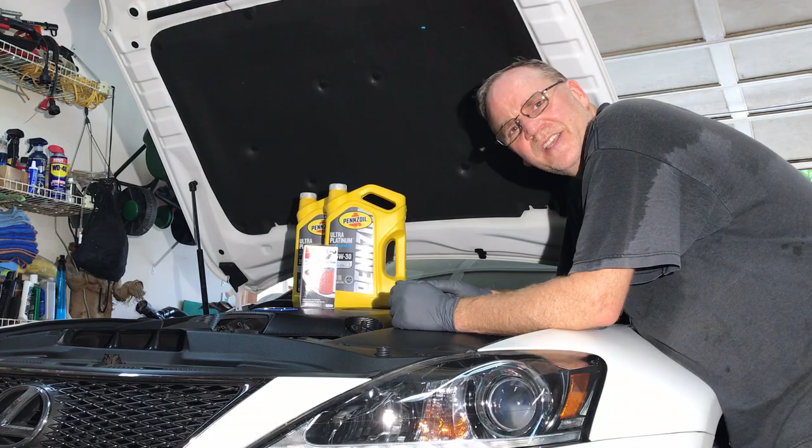Today we're going to be doing an oil change on a 2011 Lexus ISF. Should be very simple. There's lots of videos online. You should be able to find a whole bunch.

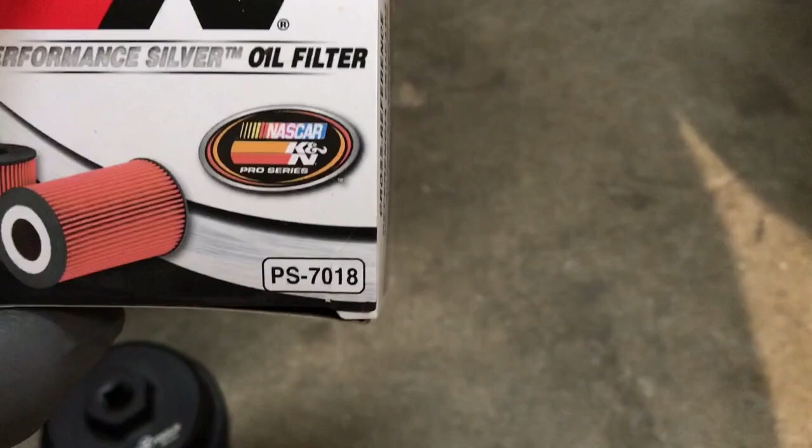Also, K&N filter - make sure you get the right one for this car. The one that is for this car, just so everybody knows, is a PS7018, and that is the performance version of the K&N. You can get it on Amazon for about $4 and change shipped if you're a Prime member.

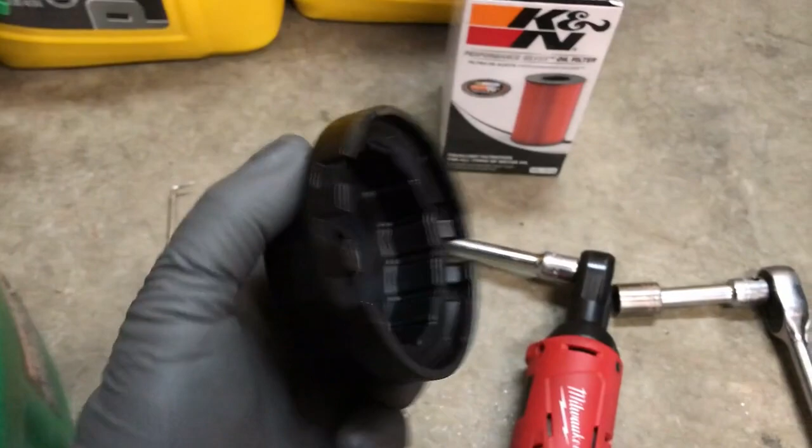One of the other tools you need to have is sort of an oil filter wrench. It's a special one specifically for Toyota. You can see it's got these little teeth inside, it kind of grabs the housing, because this is just a cartridge filter - you can see it on the picture. And the outside gets reused over and over again to try to save metal.

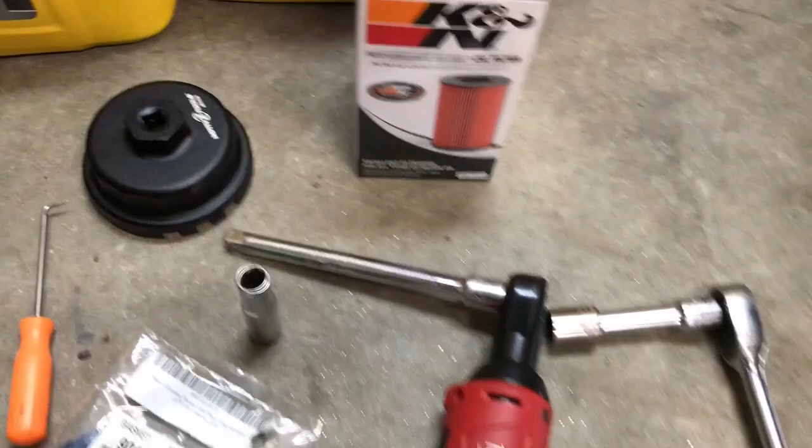This is another one I got on Amazon. There's about 20 or 30 different types. Again, this is a Motive Tools - I like the powder coating on it. I've dropped it a bunch of times, hasn't chipped. Does real good, it's nice and strong. Again, you can get what you want to use.

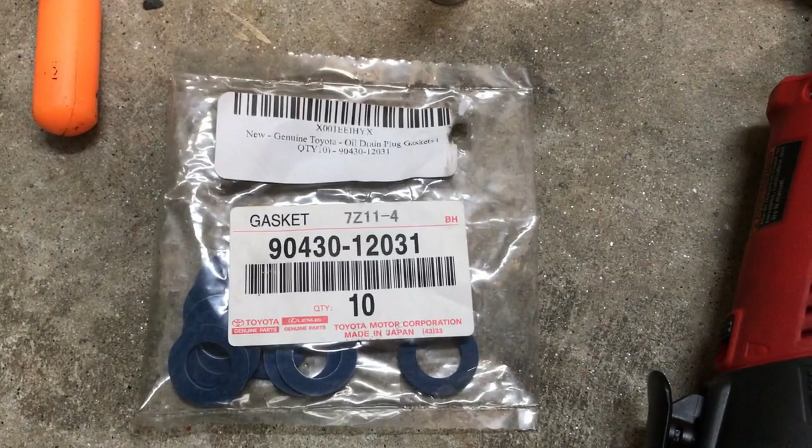Gaskets - so this is the oil plug gasket from the pan. This is a Toyota, it's a genuine one. I usually get a package of 10, I get them on eBay. I can also get them on Amazon, but that is the part number, the 90430-12031. I'll probably put a link in the comments below so everybody can try to find these things on Amazon.

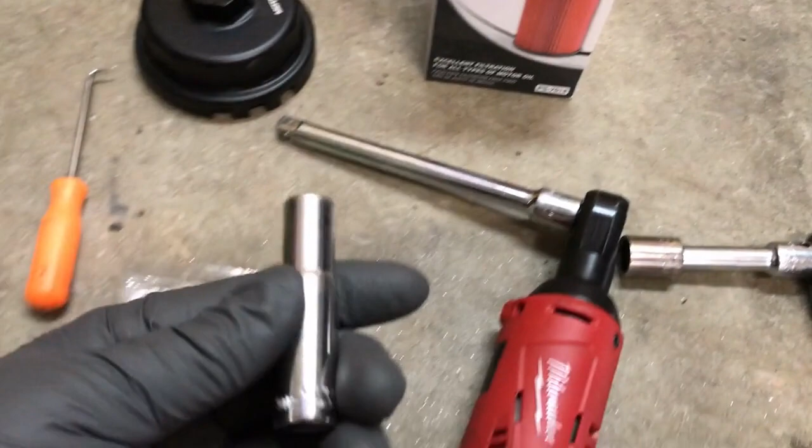The only two things you really need is your standard 10mm socket and a 14mm socket. The 14 is going to be for the plug in the pan, and the 10 is to get access to the door to the oil filter.

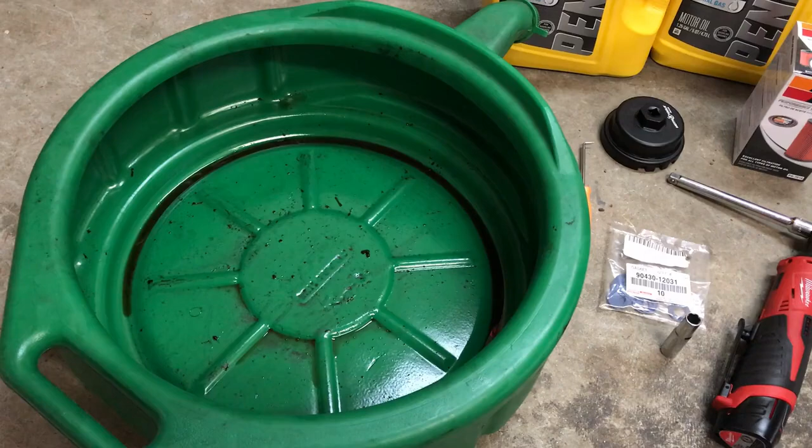Besides that, I have a little pick to try to change the O-rings in the housing, the oil filter housing, and then a really, really big pan, because you are taking out almost 10 full quarts out of the car. So if you have one of the little black pans, the ones that are graduated, they only hold about 6.5, so it won't make it. So this one is typically like an antifreeze pan, but I've started using it for oil changes. So that's really what you need.

You can have one of these automatic tools if you like them. I plan on using the pan. This is for the pan, and this is for the 10mm bolts. But you can do it how you want to do it. So now that we've got all the tools, whatever you want to call them, off we go.

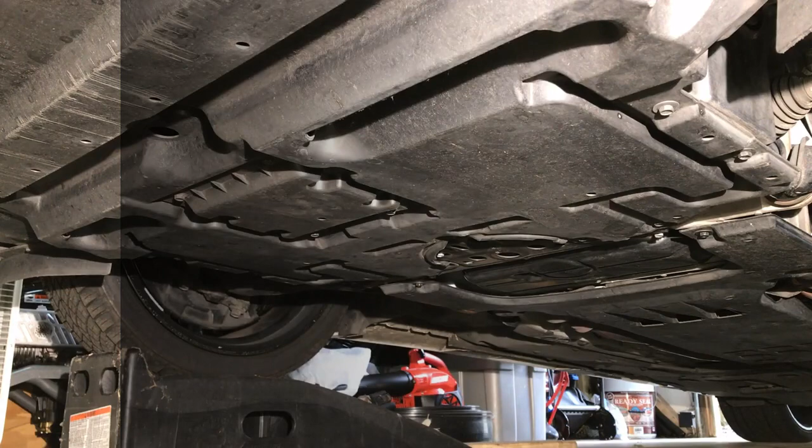So here we are into the car, just trying to give you an idea of where everything is. I try to use ramps when I do my oil change. On any other kind of service work, I use jack stands and a jack.

With an ISF, they're very, very low to the ground. These are, I forget the brand, not Gorilla, probably an AutoZone brand. I have to use, you can see over here, maybe you can't, I've got 2x4s over there. That's the only way I can get up on these jack stands. Otherwise it just doesn't work in any way, shape, or form.

So you've got two places you have to get to. To get to the oil filter, you have to get right here, this access door. It's got four 10mm bolts in the corners. All you're going to do is take the four 10 bolts, drop it, and the little door opens up to get access to the oil filter.

Now the pan sits farther back, way back here, kind of hard to see. I'll go back there and climb back there and show you where it is. The pan's plug is at the back end of the pan, so it's going to fall that way. So what we'll do is take our oil pan, catch pan, kind of shove it under the car. So that gets you there.

But let's go ahead, first things first, let's open the door. Make sure we got your tool going the right way. So here you go, there's 4 bolts. 1, 2, 3, 4. So we'll hit this back one first.

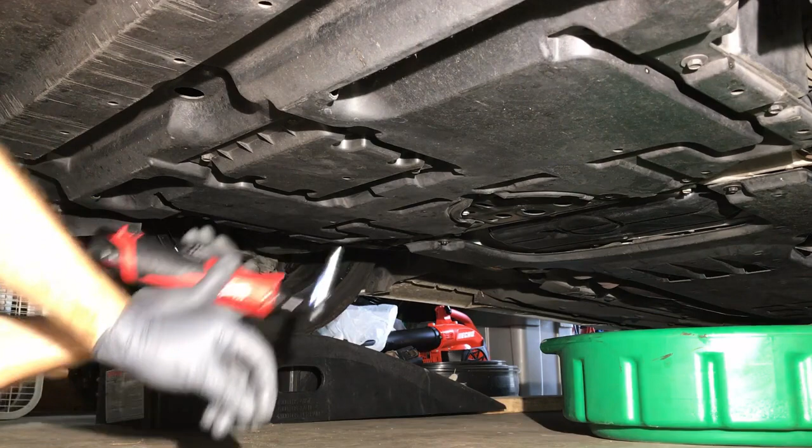There's 1. There's 2. There's 3. And there's 4, and you can see it all just falls apart.

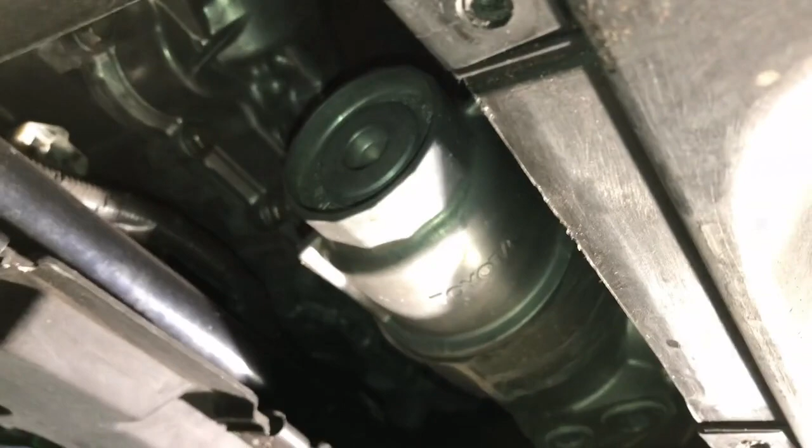So I'll give you a view up inside here so you can see what we're working on. Okay, so coming from where we are at the front of the engine, you can see again there is the filter housing. So we're going to start to look back towards the back of the engine, give you an idea where we're going. Okay, so where you see that circle, that is the oil pan right there.

That's the oil pan. Now come back here, I'm doing a backward shimmy here so you can see there's the plug. That's the plug, and you can see it's facing backwards. So that's a 14mm, just get a wrench on it, take it off.

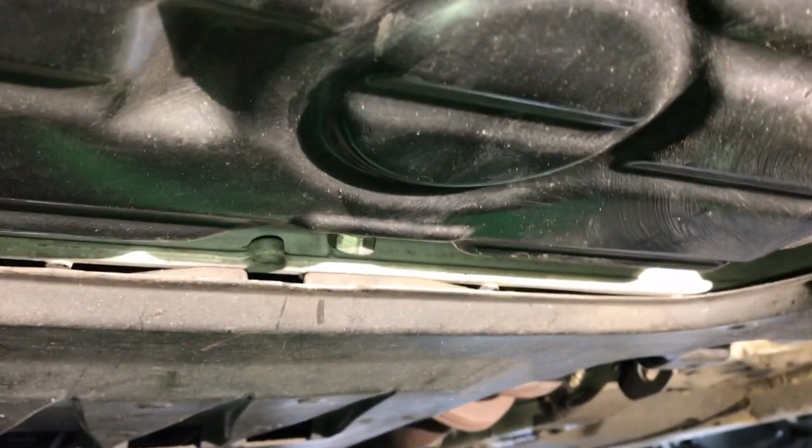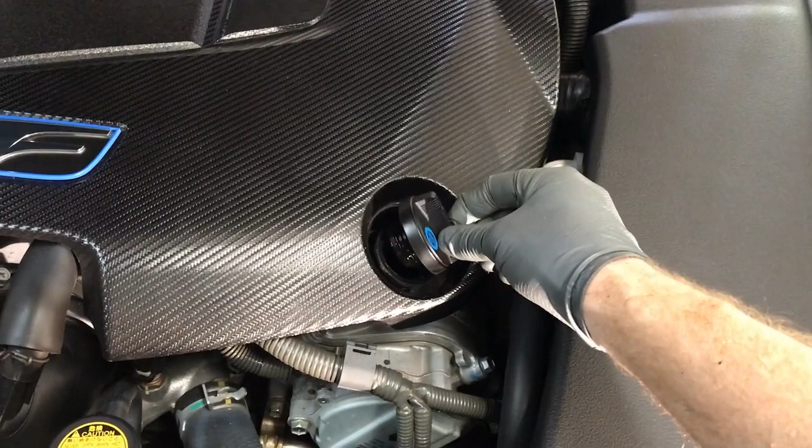What I typically like to do is drain the pan first, then crack open the oil filter afterwards. So before I start opening up the pan and go after the filter, what I like to try to do is come up here to the fill and just open it up, let some air get into the crankcase. It'll help drain everything a little bit. Some people believe in that, some people don't. I've been doing it since I was 10, helping my dad change oil.

So, on to the bottom. Okay guys, so here we are back under the car. We're going to take our 14mm and just put it on the plug. I already tried to loosen it up a little bit before. Let me get the pan out of there. Tried to loosen it up before, so it's probably already broken. Yeah, it's loose. So all you gotta do is make sure you turn it the correct direction to get it off.

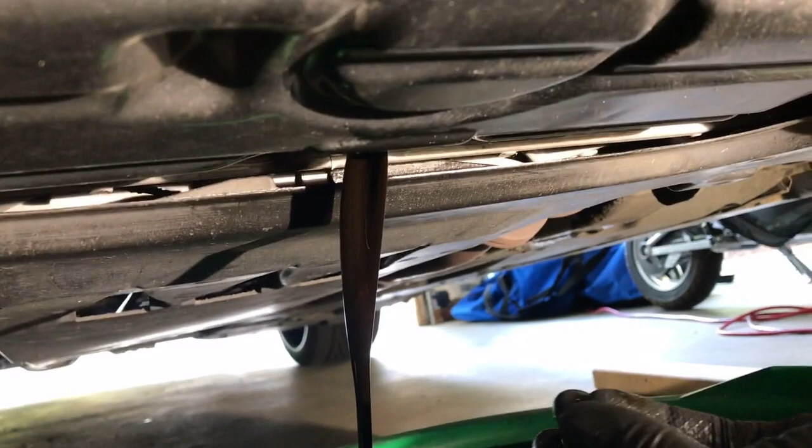Okay, you reach up on here, unscrew it, and there it goes. Okay, so not too bad looking. Again, this was the Amazon Basics Full Synthetic 5W30. It's a little darker than I would be happy with, I guess. But I'll be doing Pennzoil from now on.

So what we'll do is, I see that the plug gasket is not on here. I don't know if you can see that little blue gasket. It must either be stuck on the pan. I could feel it, it's up on the pan. We'll have to make sure that comes off. That's something very important.

You do not want to double up the gaskets on the pan. You will squirt your oil everywhere. So we'll let this finish draining out, and we'll get started on the filter.

While the oil's draining out, you can take the plug, take a clean rag, and really wipe it down, get all the oil off of it. Make sure you got it really clean. Look for any kind of contaminants on it, anything that's on there. Sometimes these plugs are magnetic based, and you could find little particles on there. I don't know if this one is, it might be, but I've never seen anything in all the times I've changed the oil. So that's a good thing, I think.

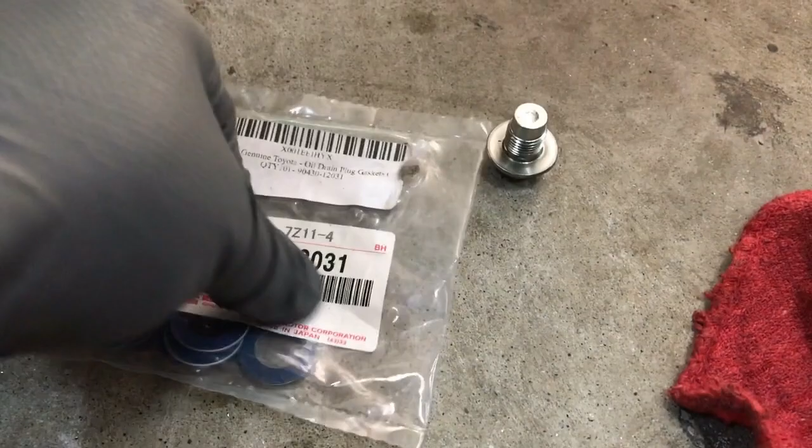Now what we're going to do is take one of these gaskets out and place it on the plug. I dug one out of the bag, and just to show you, the gaskets are basically the same on both sides. They both have a blue side to them, so there's no right or wrong way that I know of. I could be wrong. If I'm wrong, guys, just put it in the comments below saying you have no idea what you're doing, and I'll start doing it the right way. But as far as I know, I've always put these on any old way. You just slide it on, and that's pretty much it.

That is ready to go back on the car, and we're just waiting now for the rest of the oil to drain out. You can see it's starting to drip. Another minute or two, we'll go ahead and close this up. It's pretty much slowed to a drip.

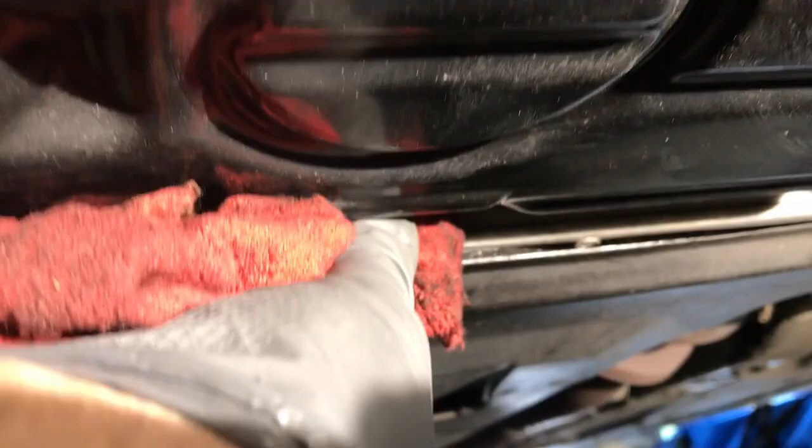What we're going to do is wipe here, and I'm going to try to feel if that gasket feels like it's on there. I may have to go back and peel it off because getting my finger on it's not doing anything. So we're going to have to go up there with a pick and maybe a scraper. I'm not sure why it's so stuck on. Never had it stick so hard before, so we'll get on there and see if we can peel it off somehow.

Yeah, its gasket's on there. I don't know if you can see it. It's kind of, let me get a pick here. You can see some of it peeling up right here. It's blue, you can see the blue on it. So I don't know why it's stuck on there, it usually doesn't, but in this case it did.

If the pick isn't going to get it off, probably what we're going to do is have to take a scraper and scrape it off, maybe even a razor blade possibly. Like I said, I'm not really sure why it's so stuck. Let's see if we can wipe it off real quick. You can pretty much see all the blue. Right here, I can feel it, it's definitely got a felt kind of feel to it. Why it's jammed on there, I'll never know. But yeah, got to make sure you get that off completely and totally. That will cause an oil leak while you're driving. So we're going to have to scrape it off. We'll go ahead and get some more.

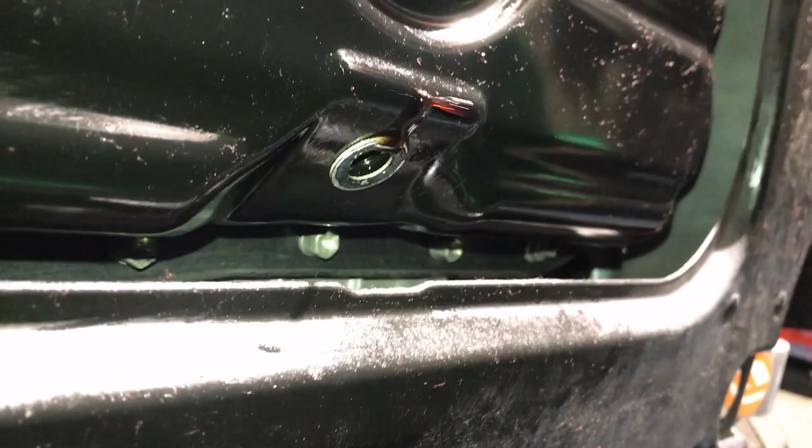Okay guys, after a good 5 or 10 minutes of scraping with a razor blade and a gasket scraper, I got it, so it's pretty good. I mean, there's still some stuff on there, so I'm going to try to clean it up a little bit more before I put the plug on. But yeah, I'm not sure why this gasket stuck so much. It may have been on there from the previous one maybe, but I usually check them and they really didn't look like anything. So it looks pretty good.

I think what we're going to do is go ahead and put the plug in. I've already got the gasket on the plug, which I might be regretting next time I do this. But all it is, you just basically slide it in, thread it on, and you can see I've got the gasket on there, a little tinge of blue and the white. That's all it is, thread it on. And you want to torque it to spec, which we'll talk a little bit about where I get my specs from. But let's just get it so it stops leaking, and then we'll torque it up.

Okay guys, let's talk next about instructions and torque specs.

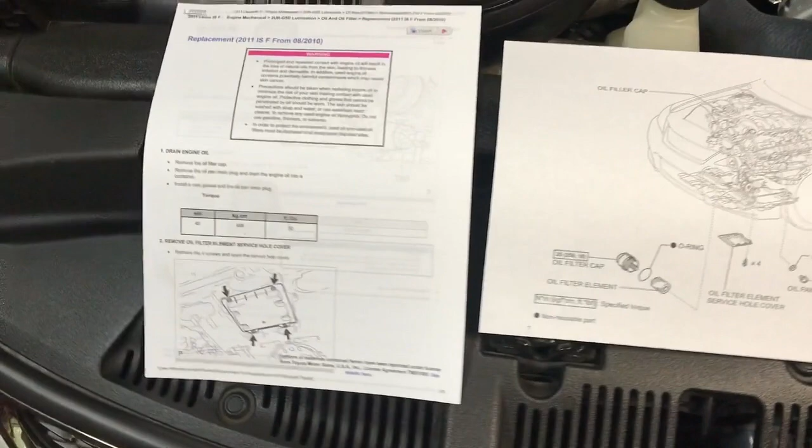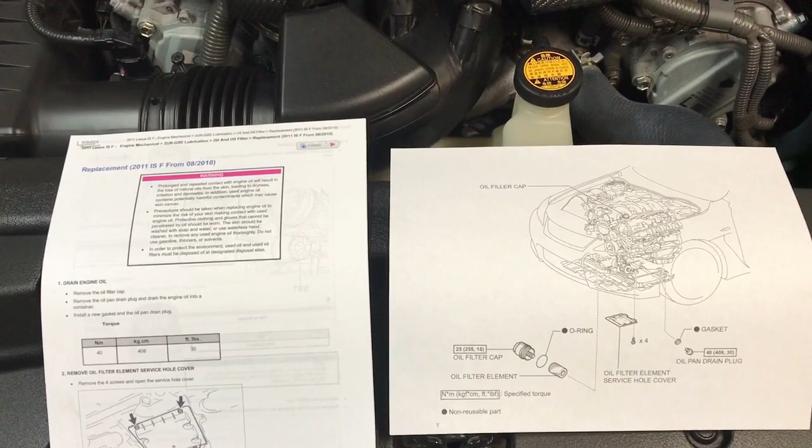I've used two different types of online instruction manuals. One is ChiltonDIY.com, typically about $22 a year, giving you access whenever you want—you can bring a tablet or computer out to your garage and log in. A lot of guys online like emanuals.com. I used it for my F, needed a 2011 manual but they sent me a 2012. When I asked about it, they said it's basically the same thing, so I took it. It's fine, it works, it's a PDF, and it gives me all the information, but it's kind of jumbled and all over the place.

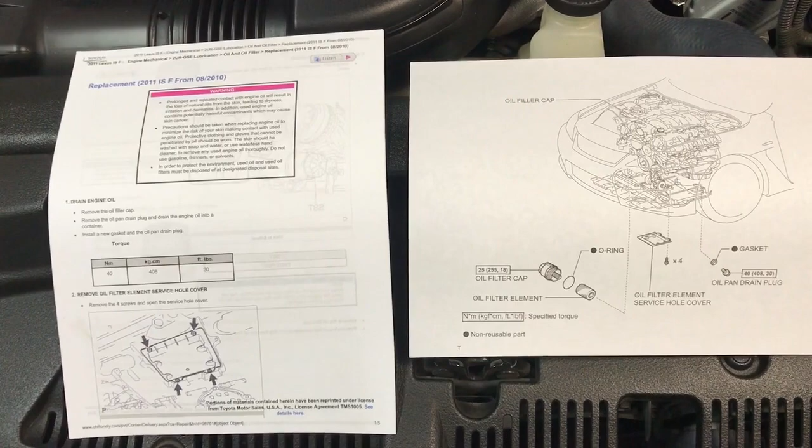With Chilton DIY, you're logging into an online manual, and you can actually save each section you want as a PDF. So you get the whole manual online, but you can save individual sections you need and use them whenever you want. To give you an idea, these are Chilton DIY manuals.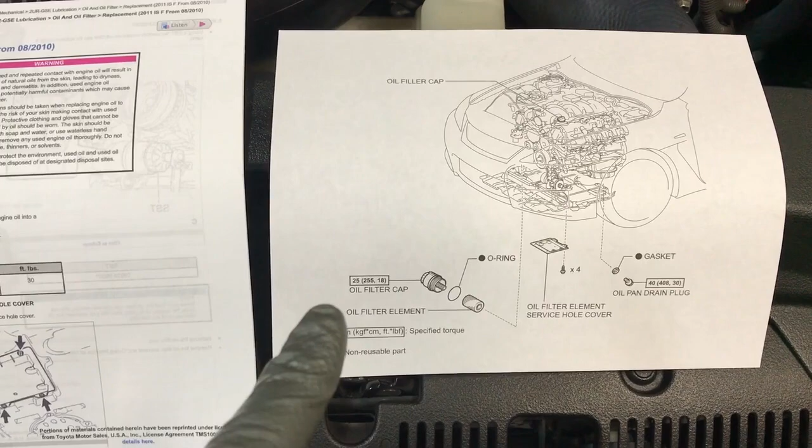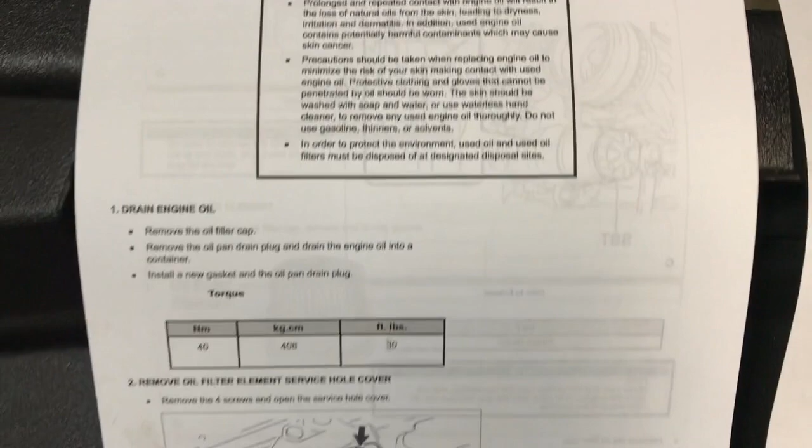This one is basically a components list—that's the header of the section for oil and filter changing. This particular one is replacement of oil and filter, and you can see at the top it says engine mechanical, oil and filter, replacement. It goes step by step, like drain the oil, and gives you the torque specs for the plug—there's the four 10mm bolts.

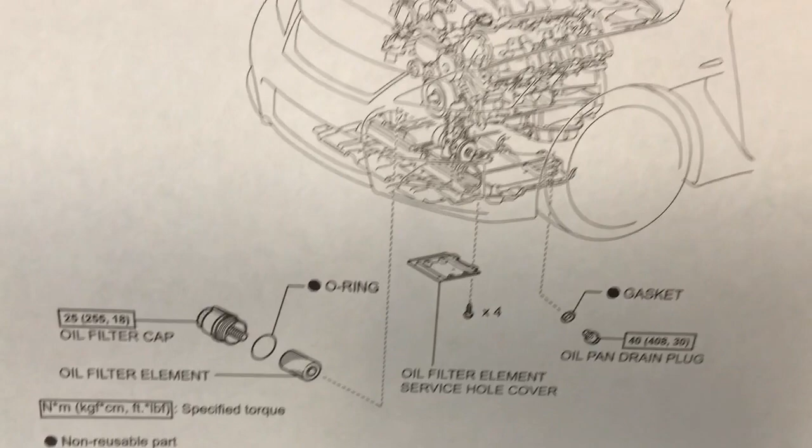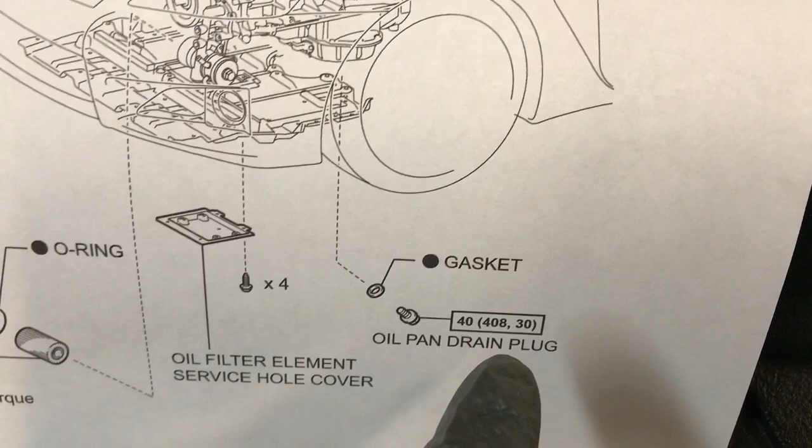Or if you want, you can come over here—again you can see the different torque specs. The one we always want to look at is the last one, which is in foot-pounds. For example, here's the drain plug gasket: we want 30 foot-pounds, and that's the same as over here on this other information—there it is, 30 foot-pounds.

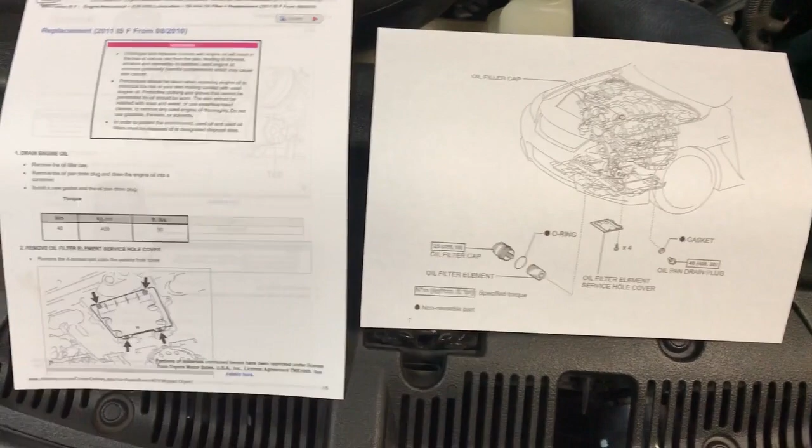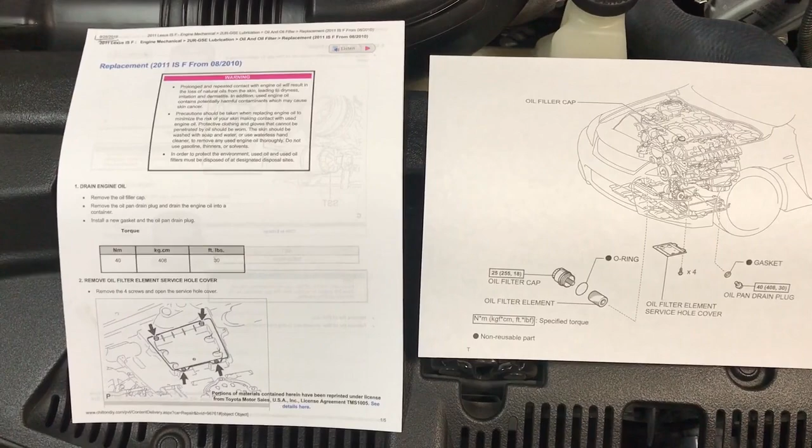So you guys can use what you like. I've been very happy with Chilton—I typically buy it once a year and download what I need. I've been downloading a lot of sections and saving them. The e-manual is fine, it has everything, it's just very hard to find things, in my opinion, maybe just for this car. Maybe for other cars it's really well put together. I've seen a lot of guys on YouTube use e-manuals and recommend them, which is why I bought them, and they were okay—I just really do like Chilton better.

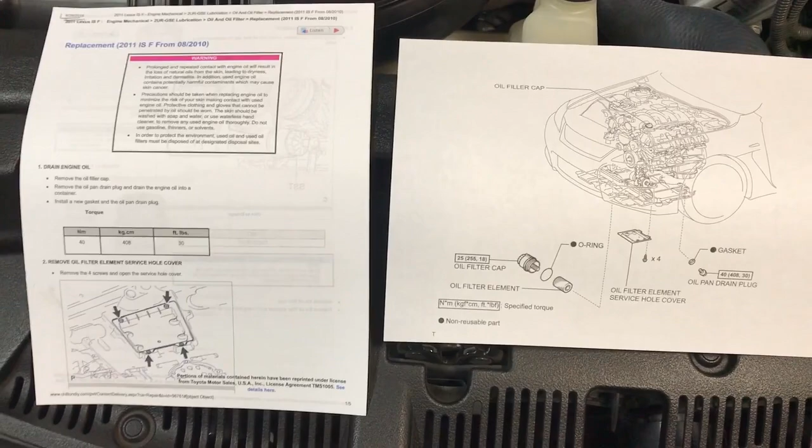So now that we know it's 30 foot-pounds both there and there, we'll go ahead under the car and tighten the plug up. Okay, we're back under the car, and I've got my torque wrench set to 30 foot-pounds. We're going to go ahead and put it on and start tightening it up.

30 seems like a lot to me, but hey, that is the spec. I'm just going to take my time. That just seems very, very tight. A lot of times I usually do it by feel. I'm probably going to stop right about here because this just seems fine. I know 30 is what it's spec'd for, but I'll be honest with you guys—there it is, right about where I was going to stop. Look at that, torqued up to 30 foot-pounds.

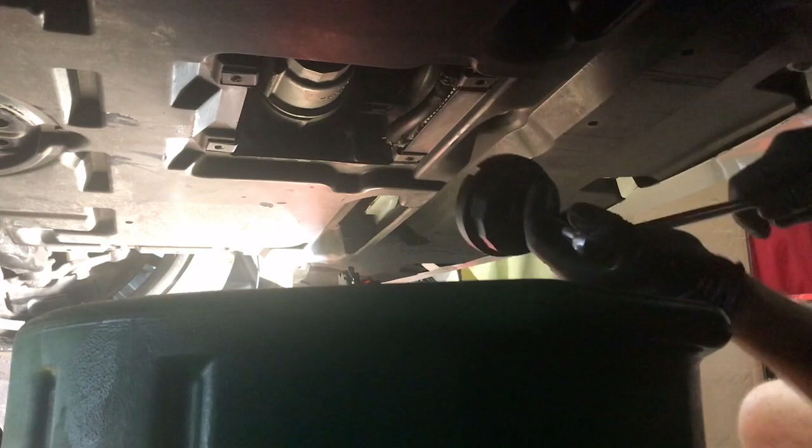Wipe up whatever you've got left—clean up the pan, anything that might have missed back there. All right, we're on to the filter. Here we go, we're going to go ahead and try to take the filter off. I've got the light off to the side, and if there's not enough light, I'm sorry—the light just seems to be blinding. So you got to make sure you have it on off, obviously.

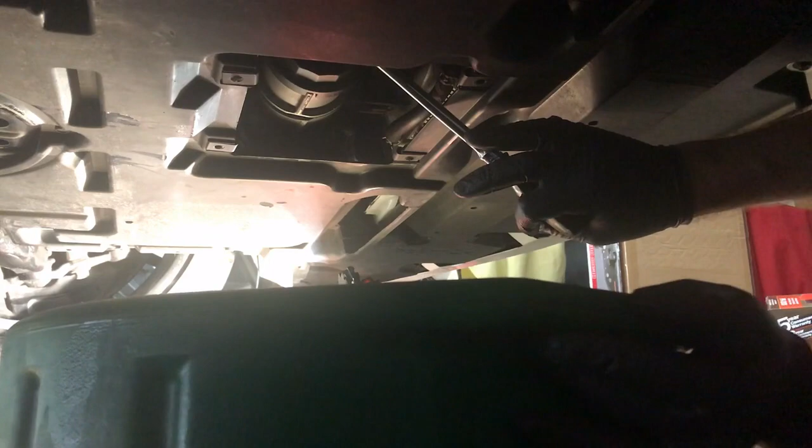You're going to fit, as we saw before, the filter wrench on the housing. Just fit it on, get a good slide, and then give it a pull until it breaks. Now you got to make sure your pan is directly under this—it's going to start leaking from here, if you can see it. Hopefully you can. It comes off pretty easy, not too bad. Now you can see maybe there's a notch in here that you want to line up—there's one of the notches that falls in place.

As you wrap around to the other side, you'll see there's another main notch right here. So that's how the wrench works, you're trying to get the notches in. Once you get it enough that it's hand loosened, you just take your time and it does come out. There it is. That's the O-ring that loosened up, and it's coming off here. There's your oil, so you want to let it start to drain.

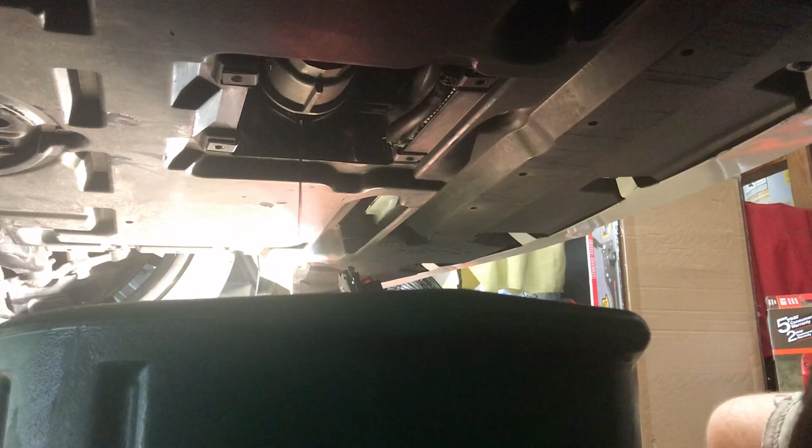Now on the ISF, they do not have a drain plug in the back of the housing. On some of the other Toyotas that have the same similar filter cartridge, they actually have a plug on the back you can unscrew and put a little insert plug in that drains out the housing. This one doesn't — I'm sure it's for reasons, maybe it wasn't designed that way at the time the car was made, don't know. My wife's 2015 Sienna has the same type of housing. I think it's actually the same filter, but it has a little plug on the back of the housing. You can unscrew it and pop in this little drain plug that opens up a valve and lets the oil come out, and when you open it up, it doesn't all come out. So basically what I do with this is I just let it slowly drain out.

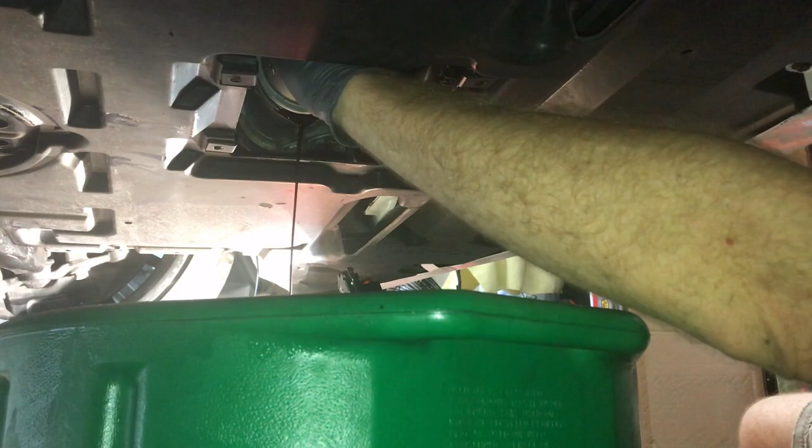Just letting it all go — you can see it, hopefully you can see it coming out. So I turned on the light, hopefully that helps a little bit. So you can see it draining out now. You can bring a little bit more, maybe just keep loosening it by hand. The more you loosen it, the more you're going to get out. It's starting to lighten up. There we go, alright, it's out.

So as you pull it, a lot of oil is going to come out. There you go, you want to make sure you keep it over the pan and drain it directly in, so it's not completely... Now the cartridge may slide out, you just have to be careful with it. You can see there's your filter inside the housing, and that's your O-ring right there. I'm just trying to get all the oil out of it.

I'm going to try to pull the cartridge out. There it goes.

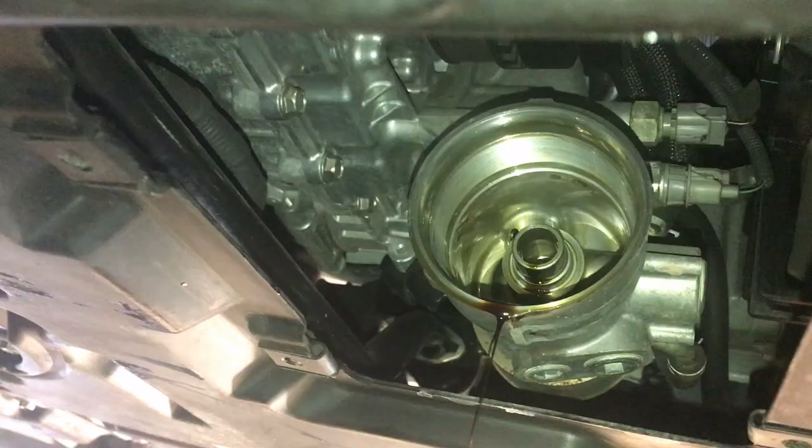Alright, so what we'll do is get you in the light so you can take a look and see what everything looks like, and we'll go from here. So just so you can see up inside, this is what it looks like in the block. This is where the filter goes in there, and it's just going to dribble out for right now. So this is the other half outside the car.

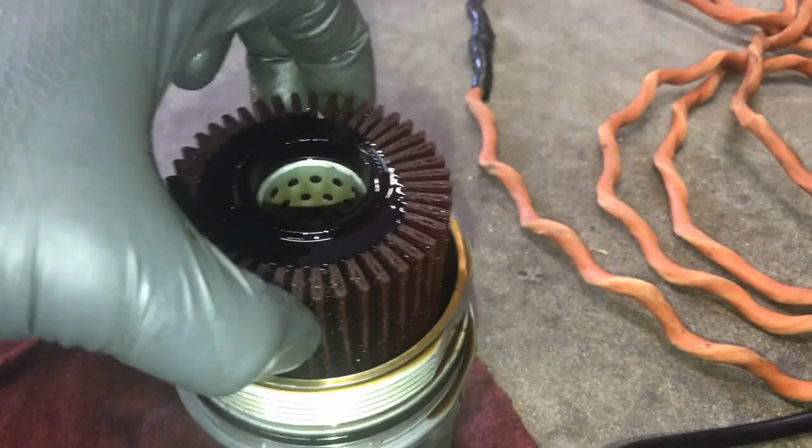You can see the filter in here, and basically it just slides over a center point. I'll pull it out and see — come on, there it is. So that's basically what you've got on the inside. It just slides over the middle, and this is the filter.

Again, this is a K&N, made in the USA I believe, and it looks pretty good. Don't see any kind of fragments in there. It looks relatively clean, definitely a different color. I'll show you what the new one looks like so you can compare the two.

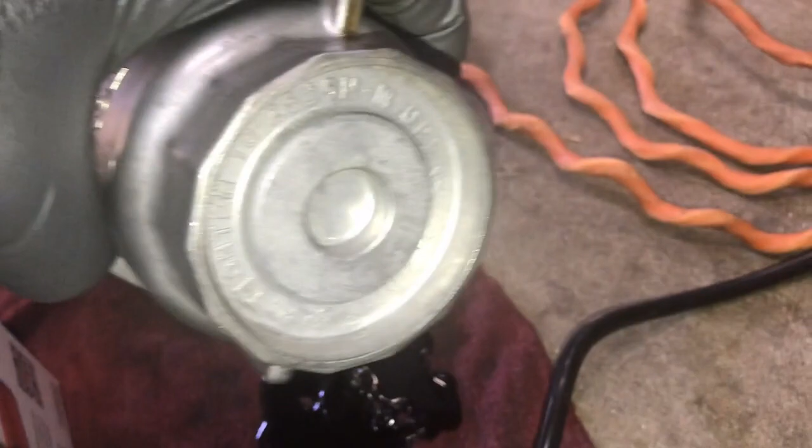So here's the filter, here's the plug I was talking about. This actually, on some of the Toyotas, on the back end of the filter, there's a plug. You can see here there's no way to open this one, but on some of the Toyotas there's a plug on the back of this, and you basically unscrew it and insert this, and it lets the oil come out. You can put a hose on the end of this and let it drain.

So the K&N kit gives you this, and you can see the difference in color between the new and the old. There's the new one, there's the old one — obviously it's saturated with oil and maybe contaminants, we'll see, just general yuck. But big difference between the two.

Also in the kit, just so you know, you get all the O-rings you need. The big O-ring is for this cartridge, the little O-ring is actually for where you take the plug off and use this. So this application, I think, fits a 2015 Toyota Sienna, which is a V6, and that's where I would use that little plug.

So we'll go ahead and switch out the cartridges and get it all ready. Taking the new O-ring out, and you can see we still have the casing here. You can see there's one place that this O-ring belongs. Sometimes I've seen people put it in this space, and if you do, you're going to have a big problem. You can still see a lot of the threads here.

So what you do is you just take a little pick, get up underneath the O-ring, and you're just going to take it off. And that's now garbage.

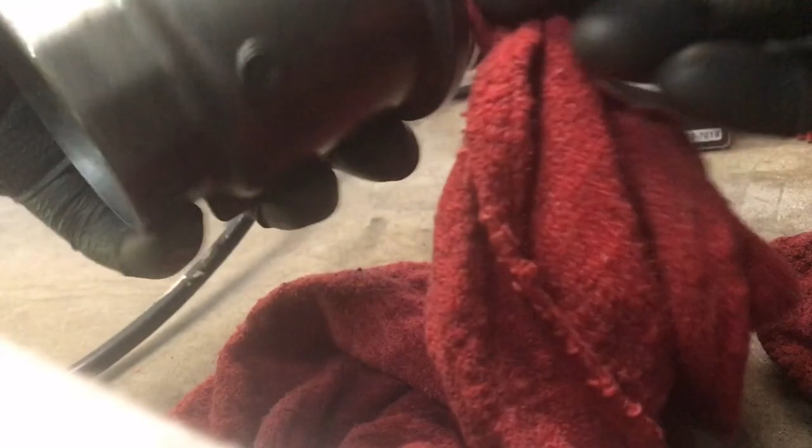What you want to do is take a little bit of a clean rag and just double check the slot is clean. Okay, so it's nice and clean.

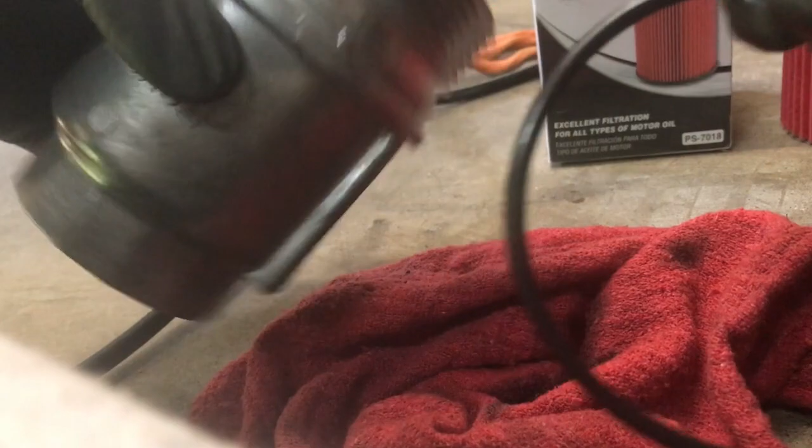And then with the new O-ring, before you just put it on, you want to take a little bit of oil, get it wet, just make sure there's no contaminants on it, make sure it's clean and ready to go. A little bit of oil on it will help it slide on and get it ready when you put it in. As you slide it in, it won't come apart, and it can bind up, so all you're going to do is fit it on.

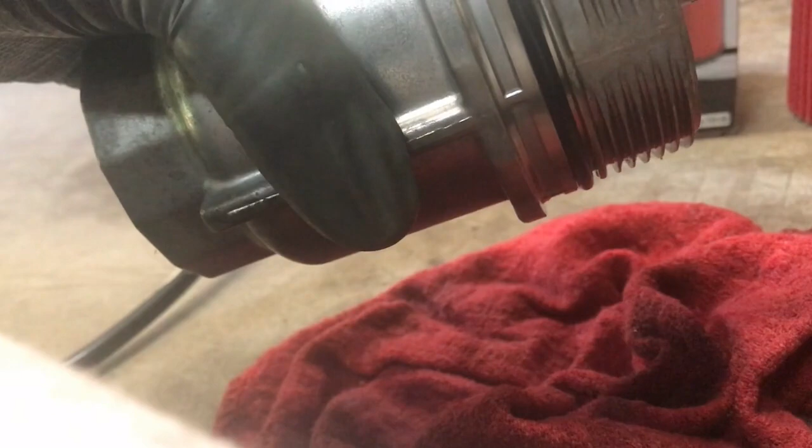Get it in the correct slot like we're talking about. So that is the wrong slot. Oh, that is the right slot actually. Here it is, that is the right slot. You can see, go all the way around, double check it. You can see it's not in this slot, it's in the lower one. Again, in the instructions I was telling you about, they tell you to make sure you put it in the right location. So I guess they've had problems in the past where people just slam them on and it's not the right place. So now that we've got this put together, we take the filter.

Now it doesn't matter which end you put in, the filter doesn't matter. There's writing on one end, nothing on the other. I usually just put it so the writing is out. And all it is, it slides. You can see it slides right in there.

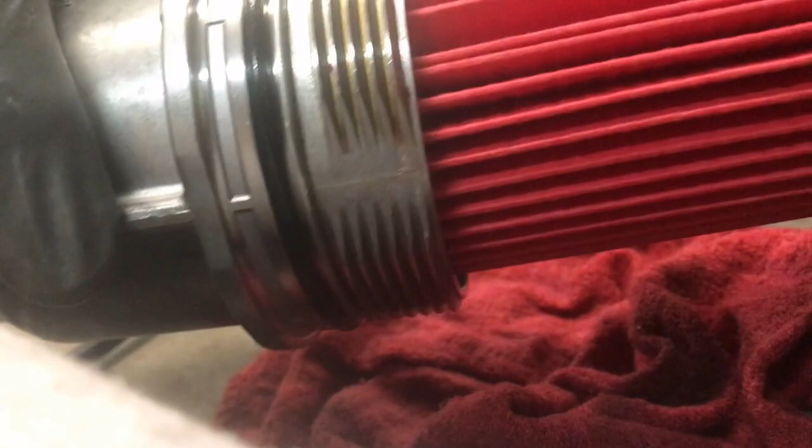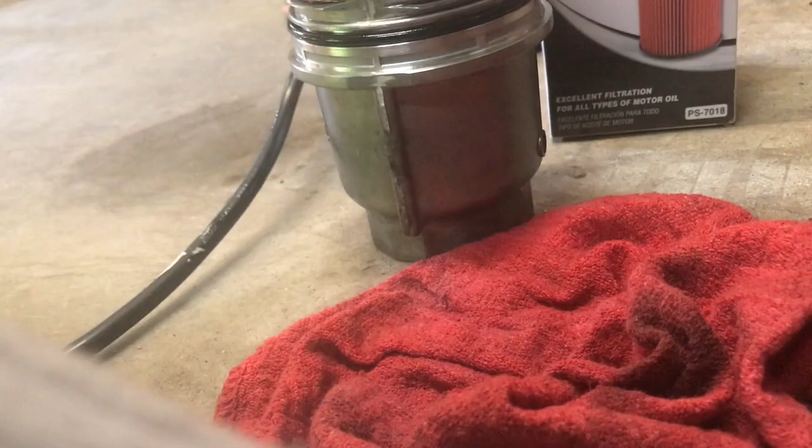And it just bottoms out. It's actually got a little spring on it, you can see it kind of springs to it. And that's it, you're in, you're set to go. This filter is ready to be put back in. So we'll go ahead, get the filter in and button this job up.

Okay, just checking the torque spec. As you can see, it's 18 foot-pounds on the cap. So we'll go ahead and torque it up.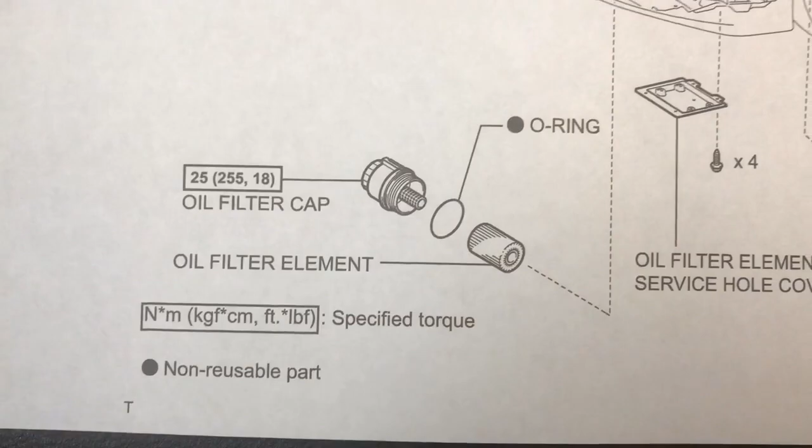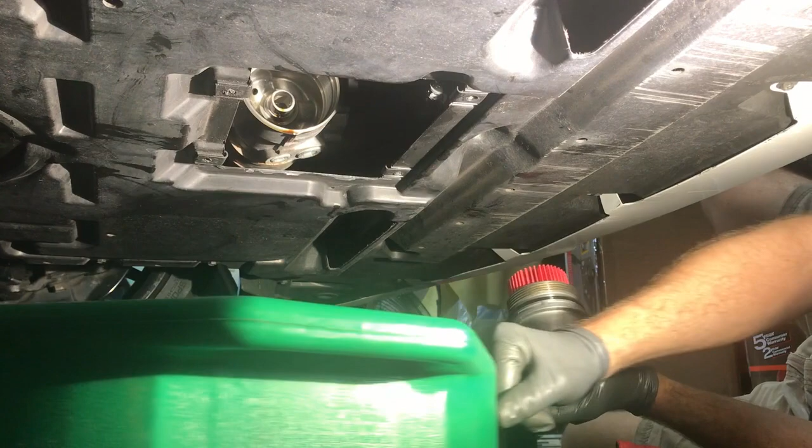Okay, so I've adjusted the lights so you guys can actually see what's going on. All right, so we now got the cartridge in, the filter cartridge into the housing. Basically what we're going to do, I'm going to push the pan out of the way because I really don't want to drop this in there, and really nothing's coming out. Take a little bit of rag, just wipe up.

We know that the O-ring came out, so you don't have to worry about the O-ring being in there. And that's something to look at — if you take the cartridge out and the O-ring isn't here, it's stuck inside. Make sure you don't double O-ring. Same kind of thing with the plug.

So just fit it in gently, hand thread it till it catches. As you start to spin it in, it'll be nice and easy. Once the O-ring grabs, you'll feel it get a little tighter. There it is, it just started to get tight. And you can grab by the two flanges here, this is one of them, and just kind of spin it until it bottoms out, or at least gets tight that you can't do it anymore.

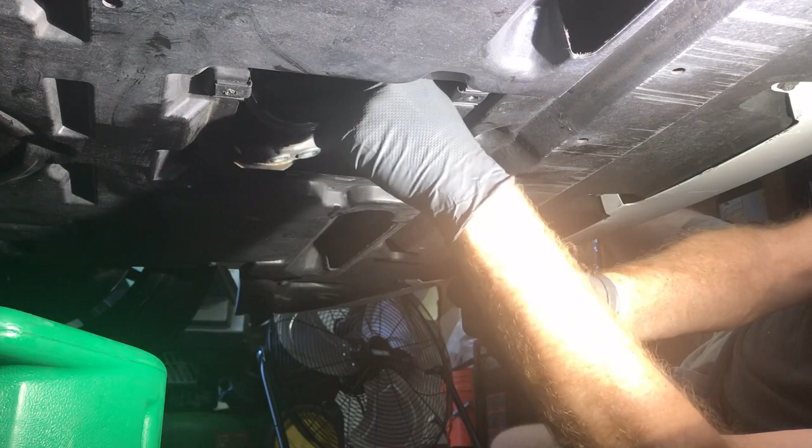All right, so still going. All right, that's about it. So now I've taken my cap and I've set it to 18 foot-pounds. There it is, it's on, and right out of the chute, 18 foot-pounds. You can hear it clicking. So we are in and tight and done.

Now what we're going to do is take our door with our 4 screws and put it back together. Okay, now that we got the filter in, we're going to put the door back on, and that buttons us up down here. So, door.

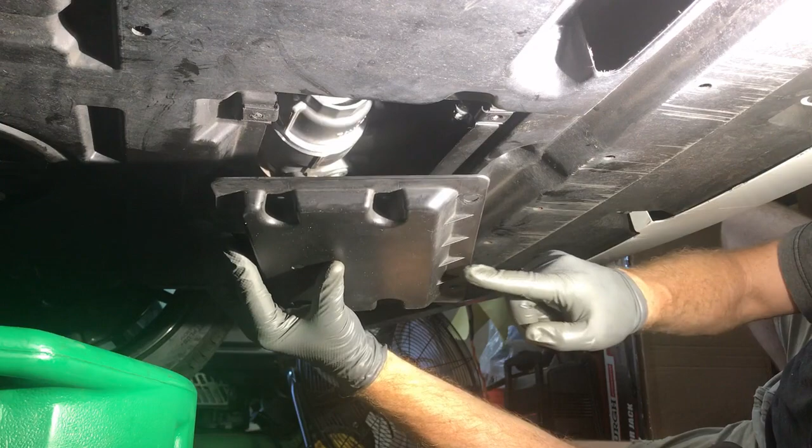Basically, the door has two sides. It's got one sort of a lip that pushes down, and the back side here that's just straight back. I've always thought, logically, you want an angle to push the air down. It also helps to see which way it came off. The side that has the points down is the way you want to get it on.

Just go ahead and start the 10mm bolts in the four corners. We just want to get the two front ones started, and then we'll snug them up. All right, one more. And we'll tighten them down.

You don't want to make them too tight, guys, because this is all just plastic. All right, so that's it. The door's in, it's secure, and we're ready to go ahead and refill it.

Looking back in the specifications, we are going to be using 5W30, and it says 9.3 liters, which is 9.8 US quarts. So we're going to fill back in 9.8 quarts for adding the engine oil. So now we know it's 9.8 quarts.

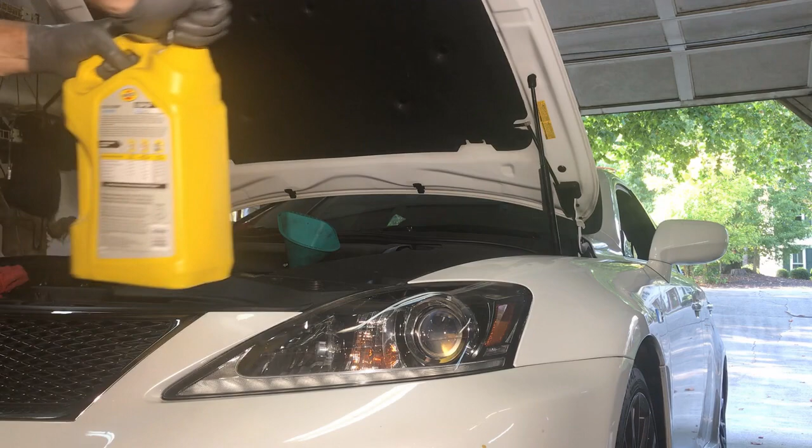We got our funnel in. Take our oil, we open it up, and we start dumping.

We'll speed up this so you don't have to be bored out of your mind watching oil go into an engine. I'm sure you all know what that looks like.

So the 9.8 quarts are in. We go ahead and take our funnel out. Put your cap on, make sure you thread it right, obviously. There you go, just enough. So now you've got your oil in, everything's ready to go.

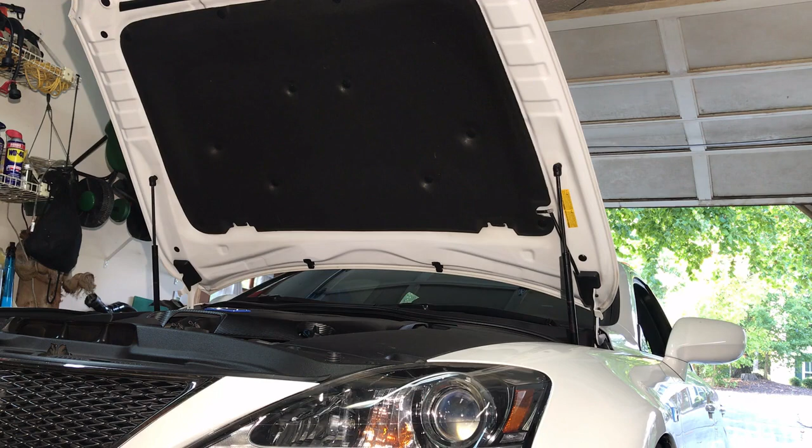One thing I kind of backed up on, we put the cover on down below on the oil filter. What I suggest is you keep the cover off when you start the car the first time. Double check, make sure you have no leaks. So what we're going to do is the cover's already off, I've taken it off while the oil was going in.

We're going to go ahead and start the car up and check for leaks. I don't see anything around the housing. See nothing in the pan coming out. There's no drips on the ground. So everything looks pretty good.

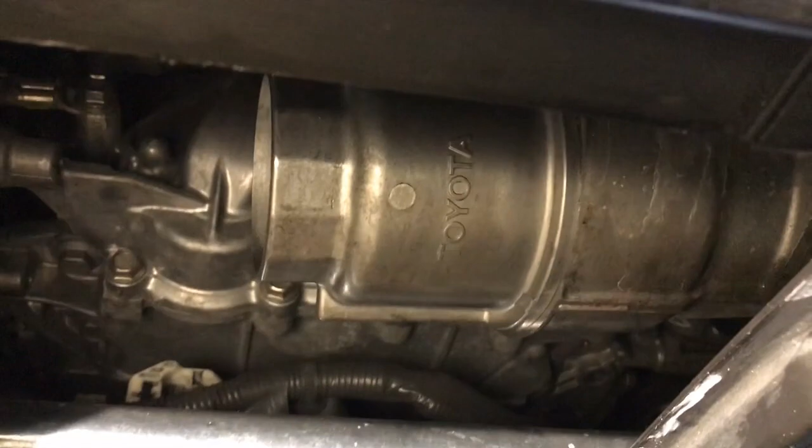We're all set. We can now button this up again, this up and down. So remember, when you do this, leave it open until you start it up and check for leaks. But so far, nothing, not a drop. Nice and dry. So that's pretty much it.

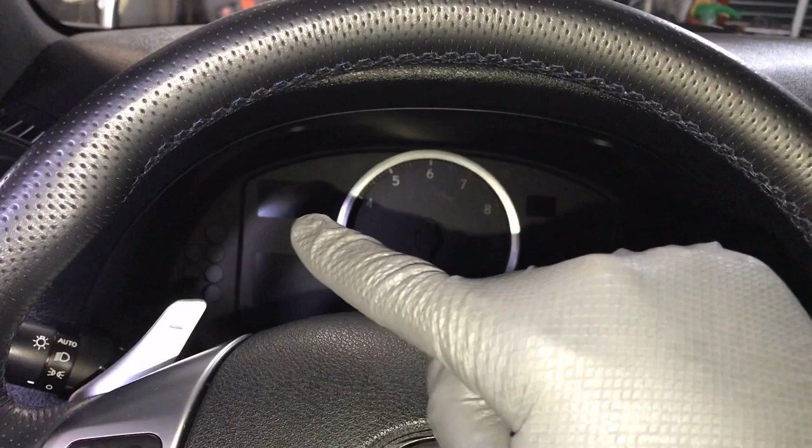Okay, so the last thing to do is we're going to reset the oil reminder light. If you remember, the oil reminder was up here in the corner, and there was a red triangle with an exclamation point in that corner. So to do it, it's real easy.

You have the car off. What you want to do is start the car without starting the engine, which means your foot is off the brake. If you know in the corner here, there's a trip reset button. You're going to hold the trip reset button down. So I'm pressing it down. And then you're going to start the car without touching the brakes, so you're just going to start the electronics in the car.

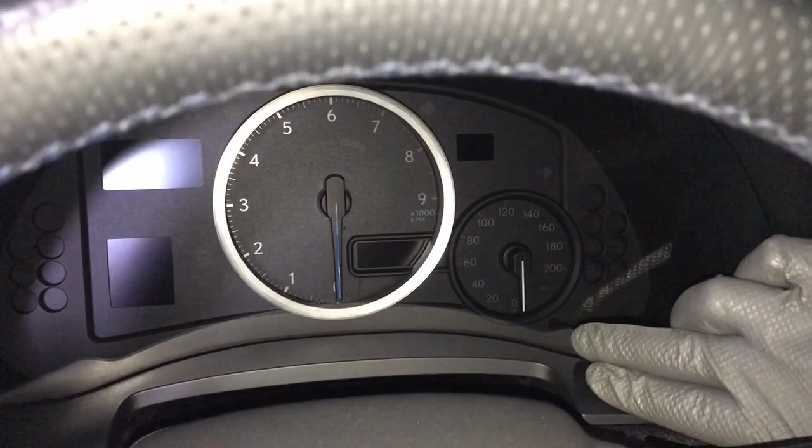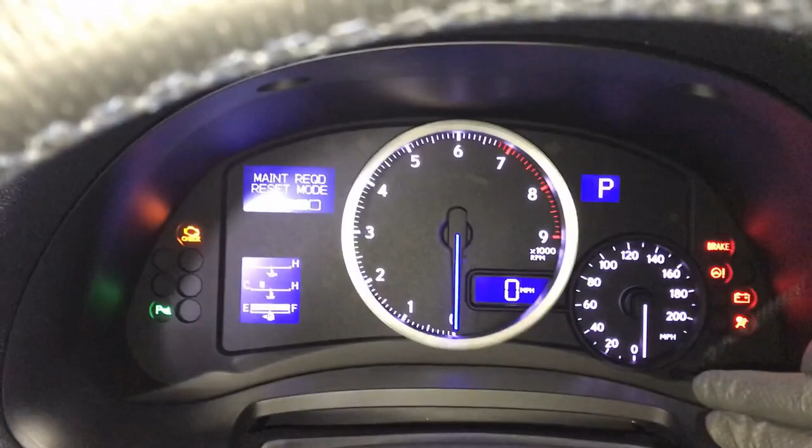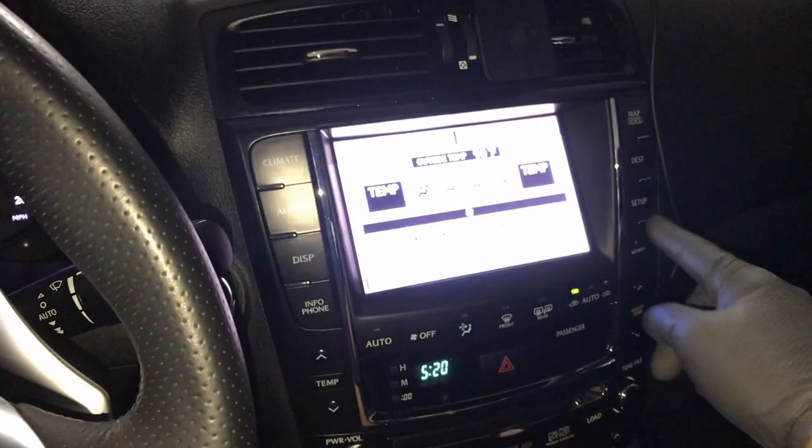So all done, that's it. We're all finished, you've completed the oil change. You've reset your reminder. If you do reminders on your maintenance reminders like I do, I have a tendency to do all my maintenance reminders.

So I go into my vehicle, my maintenance. Remember, you can change your oil and filter lights, just going in and changing those by resetting them, and you're all done. You've completed an oil change.